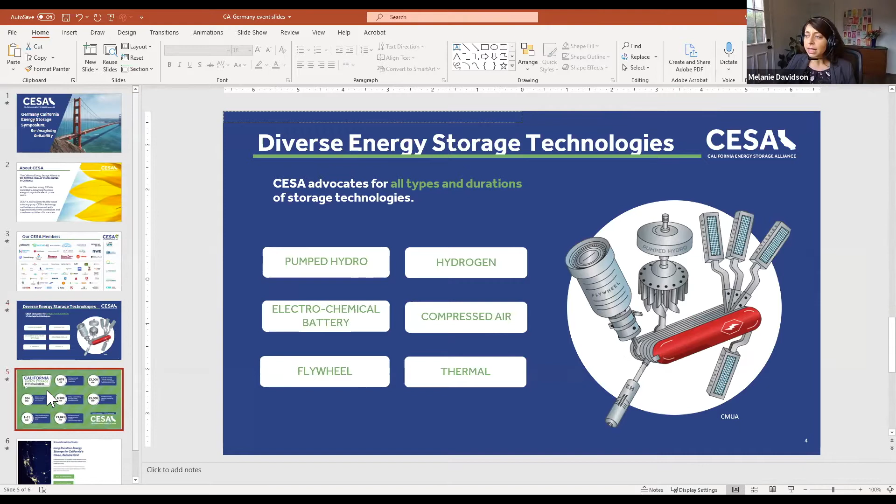California is a really remarkable place for energy storage. We're the largest energy storage market in North America. In terms of behind-the-meter energy storage, we've had over 300 megawatts procured, largely due to our Self-Generation Incentive Program. We've had over 5.6 gigawatts of energy storage procured in California. And we know that by 2030, between our own numbers and the CPUC's numbers, we're going to need between 8.9 gigawatts to 11 gigawatts of energy storage deployed in the next 10 years.

So the challenge is great. We have so many wonderful member companies that I know we're going to be able to achieve it.

And we do have some policy recommendations that we would like to see coming up over the years to allow us to support the grid and bring this energy storage online. That can include faster rollout, more support from the broader industries to help our members, educating authorities having jurisdiction and fire safety officials and permitting officials to get these systems online faster, as well as having the CPUC support us in getting longer duration energy storage systems online.

We know that as we go ahead, we're going to need more than 4 hours of duration on the grid to support reliability. So we're excited to be supporting long duration energy storage members. We recently published a study showing we're going to need a whopping 45 to 55 gigawatts of long duration energy storage by 2045 to support our clean energy grid. That can be anything from flow batteries offering 8 hours to green hydrogen offering seasonal energy storage. We're just excited about all the different ways that storage is going to come and support our clean grid.

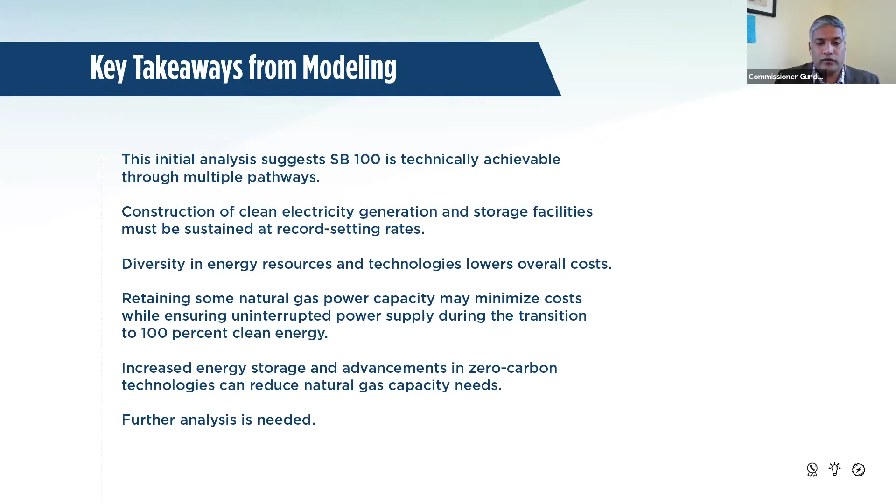Finally, further analysis is needed, as this is just the initial assessment of the SB 100 policy, and we will be doing a new report every 4 years. But in the intervening years, we'll be doing a variety of assessments to look at how you take the SB 100 goals and implement them, like land use concerns, how do you think about transmission planning, interconnection issues, as well as overarching equity issues that I mentioned earlier.

So just looking at the scale of overall build, it is daunting. In order to achieve SB 100 while electrifying large portions of the rest of the economy at the same time to meet our climate goals, we need record-setting build rates of solar, wind, and storage. To put this in context, the 3x number is basically looking at the last 10 years of the average build of solar and wind, and we need to triple that and hold it on a sustained effort for the next 25 years.

Similarly for storage, we're looking at an 8x increase. For context, last year we had about 500 megawatts of storage installed in California, and you're looking at practically an 8x value of that on a consistent basis. So the reason I laid this out is to show the importance of storage as we move forward.

The next slide, just looking at this visually, shows from 2027 to 2045 the resource build required to meet the SB 100 goals, which is compounded by the fact that we are going to electrify transportation and buildings as we go. Melanie alluded to some numbers, but as you see here, there is a need for a large amount, about 60 gigawatts of storage, the short-term or short duration storage, and you're also looking at pumped hydro or large-scale storage and flow batteries that Melanie alluded to at the top in the light purple.

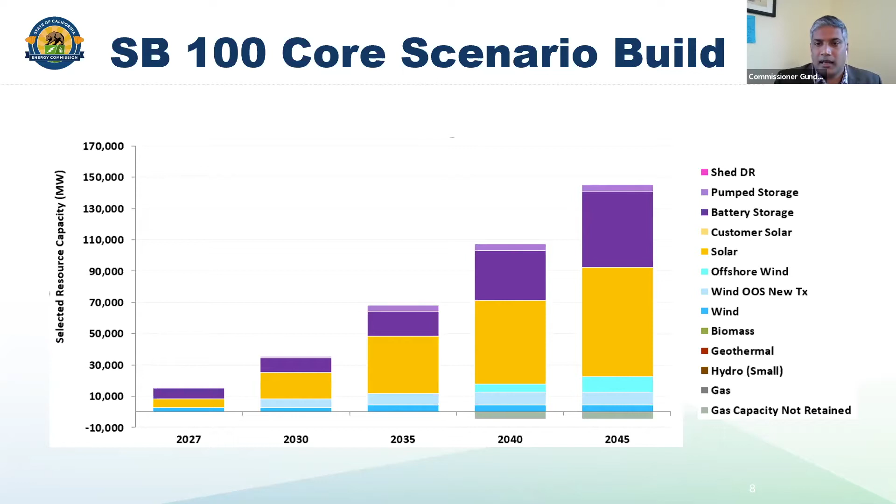I want to transition here quickly to the root cause analysis of what happened last year. This is important because as we think through clean, Governor Newsom always talks about clean, affordable, and reliable as the three-pronged approach we need to take as a state. What happened last year really cannot happen again.

The blackouts that happened last year in August send a signal that the clean energy transition is not reliable, or that we are not prepared for such high loads of electrification, or for the planning around the uncertainties of how solar and wind behave.

I wanted to set the context and make sure the record is good here, which is that CAISO, CPUC, and CEC, after the rolling blackouts, were asked by Governor Newsom to develop a root cause analysis report, and most of you have probably seen it already. There are three main issues that came out of it, and I want to set that up at the start.

The first is the climate change-induced extreme heat waves that happened across the Western United States. It's important to keep in mind the accelerated rate at which climate change is happening. The west-wide heat wave was so extreme that it was a 1 in 30 event in August and a 1 in 70 event in September — the 95th percentile and above heat that California and the overall West experienced.

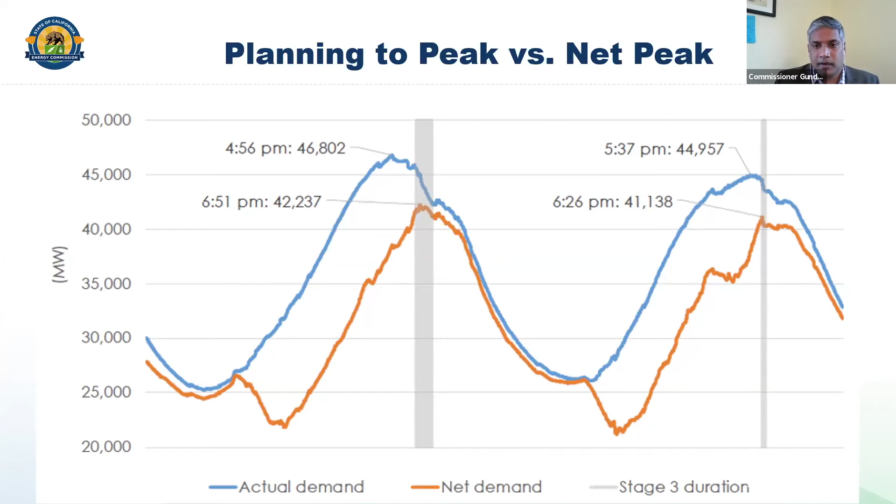As you see here, the rolling outages, grayed out in vertical lines, both happened in the net peak hours. So as we move forward, I believe storage has an important role, not just from a bulk grid demand perspective, but really from a reliability perspective in the net peak hours, where you're looking at rapid dispatch onto the system. So I will close with this slide.

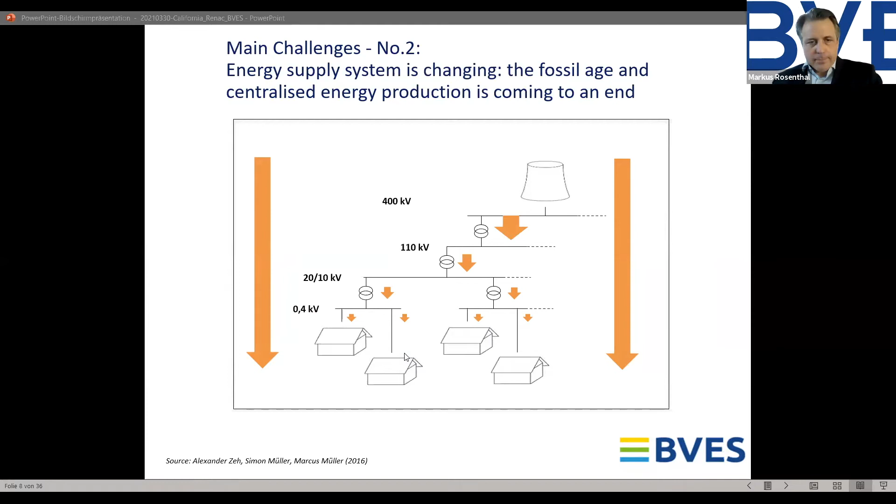So this is the old energy world, where energy was produced in a central way and used in a decentralized way. And this is the new world, where energy is generated in a more and more decentralized way, and of course used again in a decentralized way. But that is a new system, and that's the transformation — the big challenge of the transformation for regulators and for business to adjust to this new world.

Just one focus on Germany: we have lots of wind power in the north and lots of factories in the south. The only exception is Volkswagen — Volkswagen is in the north, but lots of other car manufacturers like Daimler, BMW, and lots of our factories are in the south. The big question is, in the centralized world, how do you bring the energy from north to south?

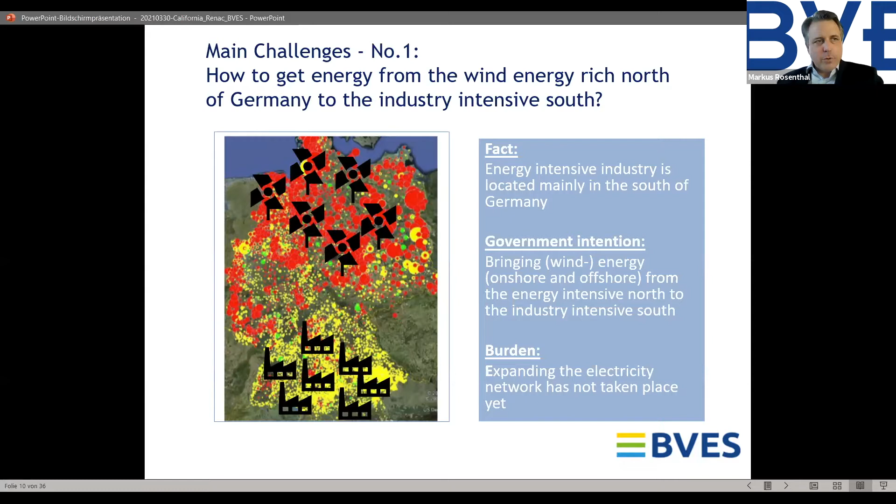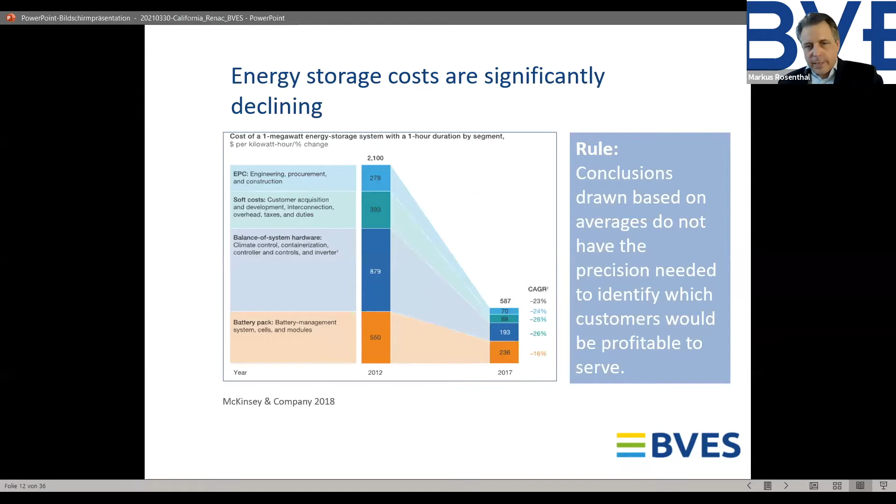As I already pointed out, energy storage costs are dropping. These are slightly older figures, but the trend is very clear. And as I pointed out, demand is increasing within the EU and on a global scale.

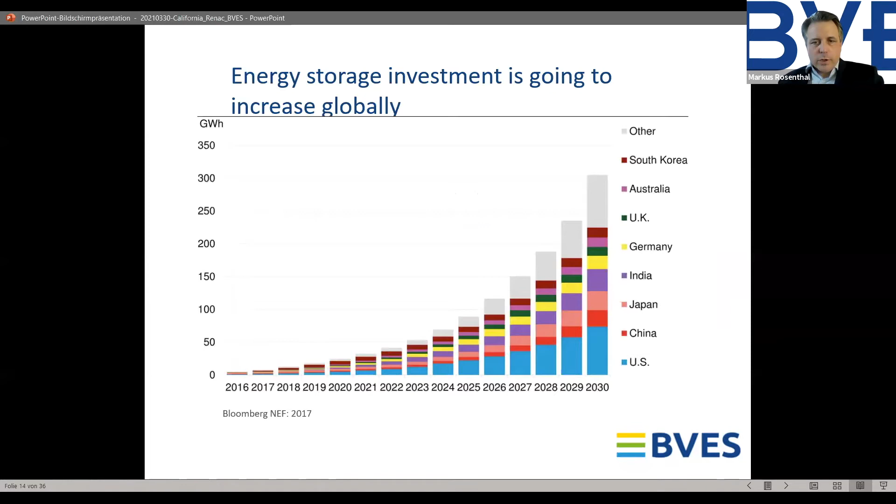Renewable energy in combination with energy storage serves as a solution because it decreases energy costs. It guarantees the availability of supply. Very important, it reduces carbon dioxide emissions because it's a much more efficient system than the old energy world. And that is very important in Germany. Coal is about a third of our energy supply, and coal is still acting as a safety belt when there's no wind and no solar power.

But due to energy storage, we are slowly moving into a new direction. Just to give you one example, we have a very big coal company in the east of Germany, and they installed a very big, many megawatts big giga battery, because they realized it's better for them to use a battery than to burn coal. And that is also an indicator that things are moving on. Of course, this company has also, for two years, been moving into the direction of renewable energy. So there's a permanent change.

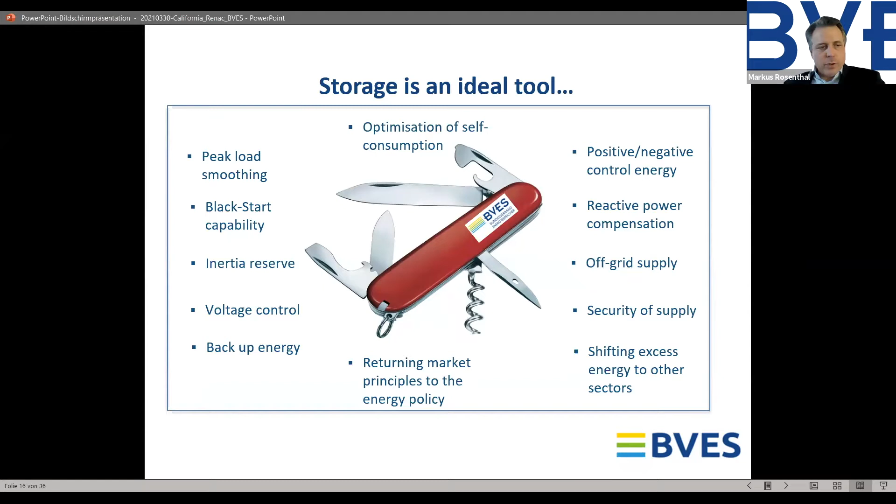We already have seen the Swiss knife in the first presentation. You will have seen this picture in one way or another, showing what energy storage can do, which services energy storage is offering.

Now I'm focusing on the regulatory and the political environment.

As I pointed out, McKinsey has come up with a very simple definition. And thank God the EU Commission and the national governments contributing to the EU decision-making process, including our Berlin government, said energy storage is a means in the electricity system deferring the final use of electricity to a moment later than it was generated. What you have here is a slightly more complicated phrasing: energy is generated and used at a later time. What's the role of energy storage?

What's the role of energy storage in the market? Within the EU, it is very clear that energy storage should be market-based, and it should play a competitive role in the market.

We do have a regulated market where the transmission system operators are active. They have a guaranteed income that is decided every five years on a regular basis by the regulator, determining how much income they have.

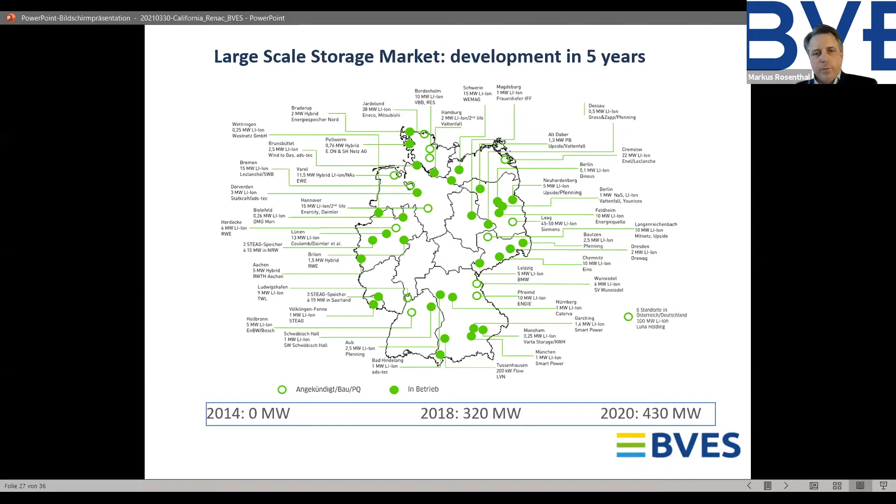What you can also see is just one picture in terms of batteries for bigger units in energy storage. In 2014, we couldn't have shown this picture. In 2020, that's already happening. And what you can see is market forces are fast, market forces are driving the business.

So I come to the conclusion: energy storage is a game changer for the regulation. Energy storage is many technologies - it's battery, thermal, hydrogen, and much, much more. And energy storage guarantees the quality and security of supply and the market integration of renewables.

We do have two English-speaking working groups at the BVES. One is the EU working group, focusing especially on EU lawmaking, and the other is the International Markets Working Group, where we also happily and consequently focus on the United States a lot, but also other countries. So thank you very much. I hope I kept my time, and any questions, please feel free to ask me.

Thank you so much, Markus, for sharing your insights. I found it very interesting, and I see that Melanie Davidson is still with us from CESA, and that both you and CESA use one of the same slides to describe energy storage.

Since we don't really have more time for questions, I'm just gonna ask you a question - you can just shake your head yes or no. Both the German Energy Storage Association and CESA are very involved with policy for the energy storage industry. Are you guys working together at all? Do you collaborate? I'm relatively new at our association, so this is my first contact with the United States, but I'm happy to share.

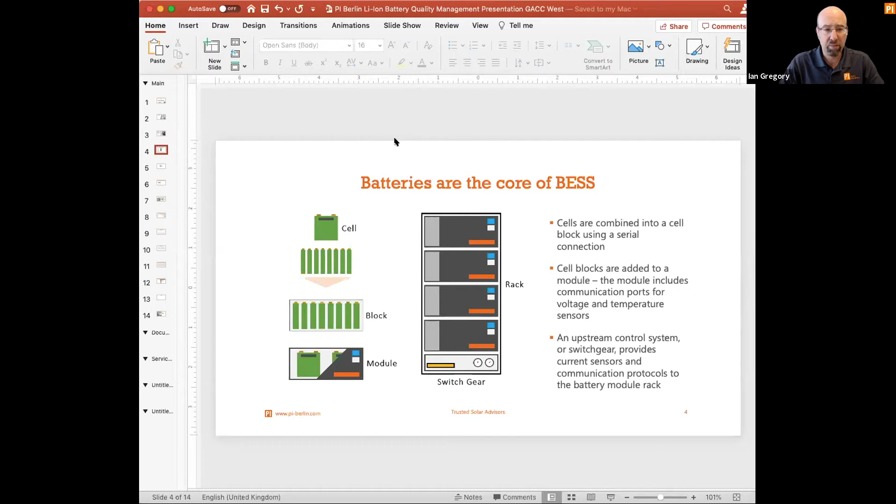Batteries, here's an image showing the breakdown of batteries within a storage system, made up of individual cells that are combined into blocks and then into racks. So that already indicates that managing quality in large scale storage systems requires management of quality everything from individual cells up to the combination of many hundreds of individual cells into the complete system. Lithium ion is still today the dominant battery technology, making up more than 98% of batteries deployed as part of large-scale storage systems in the US today.

So paying attention and focusing very much on lithium ion battery technology is important for us and important for the industry.

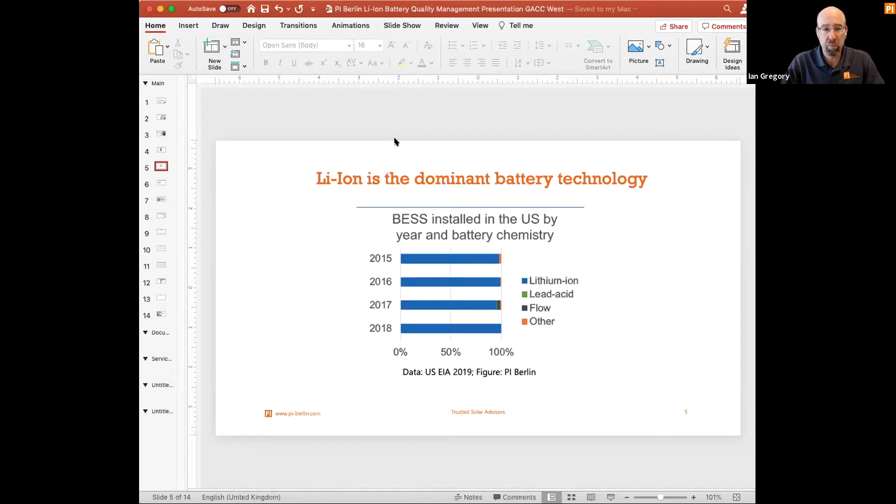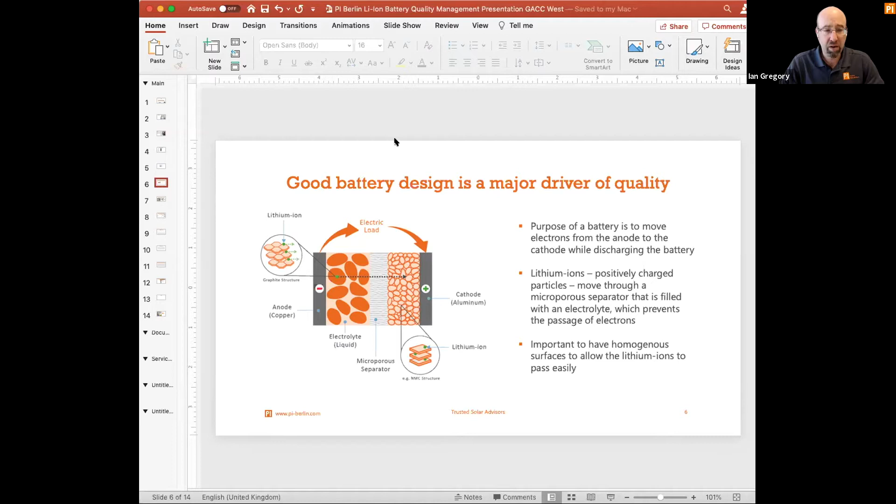Good battery design itself is a major driver of quality, no surprise. For example, it's very important that the surfaces within a battery design have very homogeneous surfaces, and that the various chemical processes that need to take place in a battery are allowed to take place with a high degree of both safety, reliability, and of course performance. But more than that, the manufacturing processes that go into manufacturing a battery are equally as important.

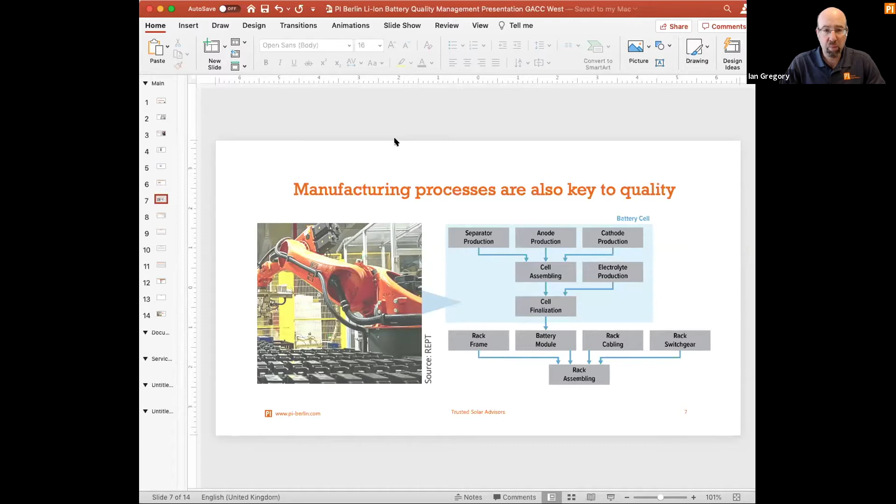If you take an overall view of quality, you need both a well-designed battery and a well-manufactured battery to produce one that's going to work as you expect. In fact, the processes of manufacturing batteries are very complex, involving over 170 individual steps, each of which has to work right in order for the finished battery to perform as expected.

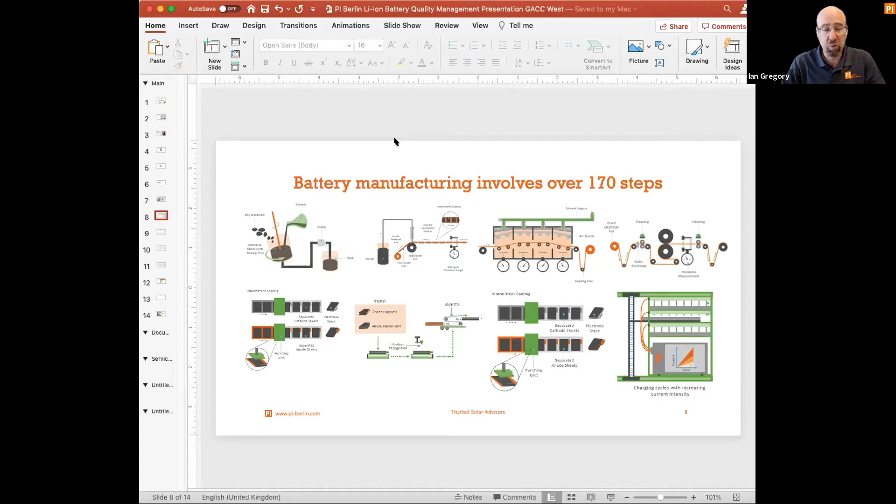There are a number of key risks to battery quality, and the focus on the battery within the broader storage system is extremely important, as the battery represents the greatest risk to safety in the system, as well as the fact that without a good battery, of course, the rest of the system won't perform the way you expect.

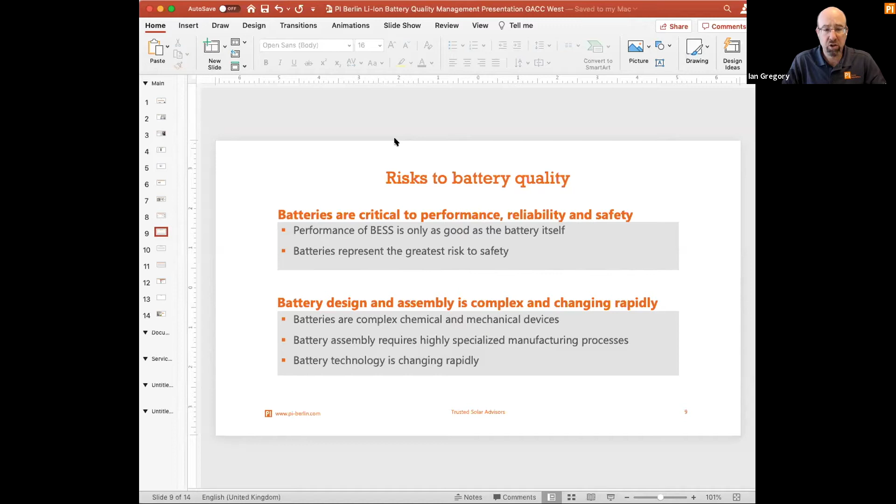We're also in a challenging environment where battery design and technology is changing rapidly, which is a good thing, but demands a lot of attention to quality to make sure that as rapid changes in technology take place, it's not impacting quality. We also see the same in manufacturing processes. In many facilities that manufacture batteries around the world, we see under one roof, often production lines that are very different from each other, producing the same battery, but with very different manufacturing technologies, each of which could have an impact on the quality of the finished product.

The number of battery manufacturers is also proliferating rapidly. Beyond the big players in the industry like Samsung and LG, a large number of new manufacturers are coming into the market from China, for example. And then questions certainly are raised, is that those batteries may be cheaper, but is the quality being impacted by the lower cost? So clearly we need solutions to be able to ensure that those batteries are of high quality.

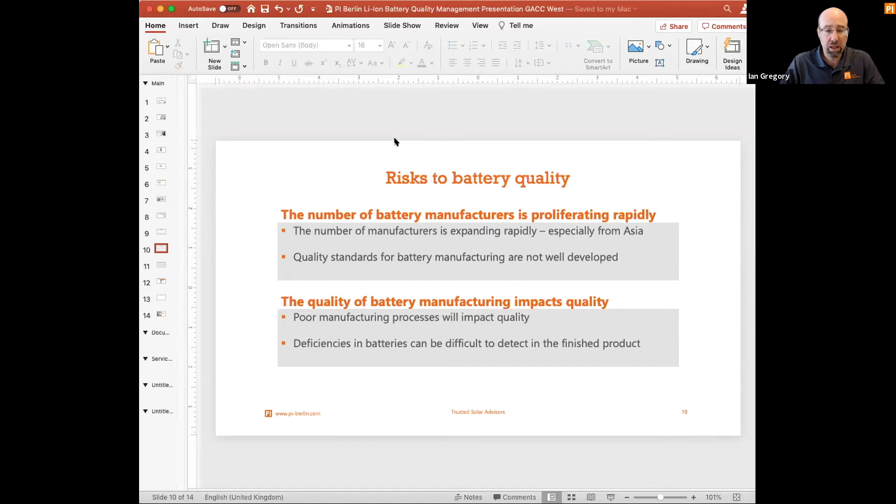The last point, risk, is clear within the manufacturing process itself, that any of the 170 steps which are not conducted correctly could impact the finished product. Having good insight into the actual manufacturing processes is really important, because many of the defects that may impact the safety or performance of a battery are very difficult to detect in the finished product. Only by really understanding the complete manufacturing process behind the battery can you really have a full picture of its quality.

To close, in terms of what PI Berlin does, we provide independent factory audits for major buyers and investors in the industry as a key way to manage the quality of the battery itself. We go behind the curtain, taking a detailed look at the complete manufacturing process, and report back to the buyer or investor with actionable findings, so those findings can be used to work with the manufacturer to drive improvements in quality before the batteries are produced for any specific project.

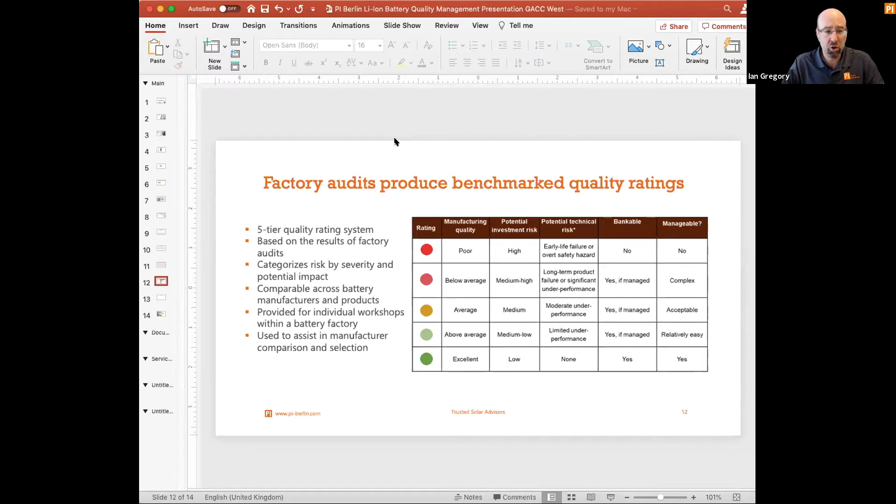PI Berlin has experience conducting more than 300 audits of different factories around the world, manufacturing PV modules, inverters, and batteries. Out of that, we produce quality ratings, benchmark quality ratings. As we operate to a common standard across all factories we assess, we're able to benchmark the quality of one battery versus another, which certainly assists any buyers or investors who are shortlisting potential suppliers.

In summary, we're well aware that the deployment of large-scale battery storage is growing fast, but batteries present a mix of risks that we must pay close attention to while their deployment grows rapidly, from technology changes to proliferation of manufacturers and the complexity of the manufacturing process. The good news, however, is that factory audits are an effective tool to identify where risk is and mitigate it before production for any particular project.

Thank you, Angelica. Back to you.

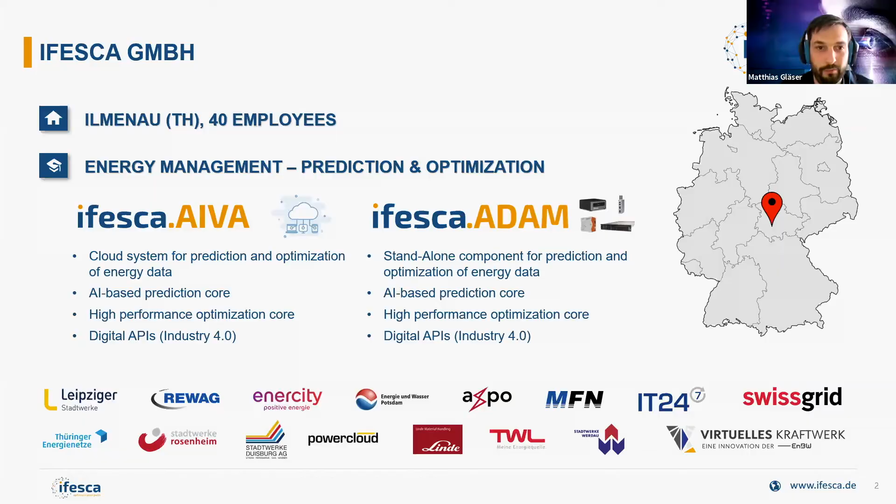So now I hope it works. Beautiful, thank you. So as I mentioned before, we have these two products, and what we are looking for in the US are partners and customers, of course. We are looking for energy sales, power generation, all these beautiful people who can get us information about the US market, and we can share our information in forecasting and optimization.

So what's our forecasting platform? We have our cloud product, called IFESCA AIVA, and this is a fully automated analysis and forecast platform. So you have a short look about how it works. We have many data from wind, from solar, from heating points, from electric cars, and so on, that we are collecting in our database to get a forecast and an optimization for this.

And what we also use are influencing factors to get the best forecast you can get on the market, so you can get a very high benefit.

So how does it work? On one side, you have a descending system in your company; these are the input data. We need about 3 months to 1 year of data from behind, to learn from this data in our AIVA hive and get a good forecast. Our knowledge base benchmarks this with other historical data and uses its cognitive core to get the best methods and analytics systems to get it fully automatically for the benefit of the forecast.

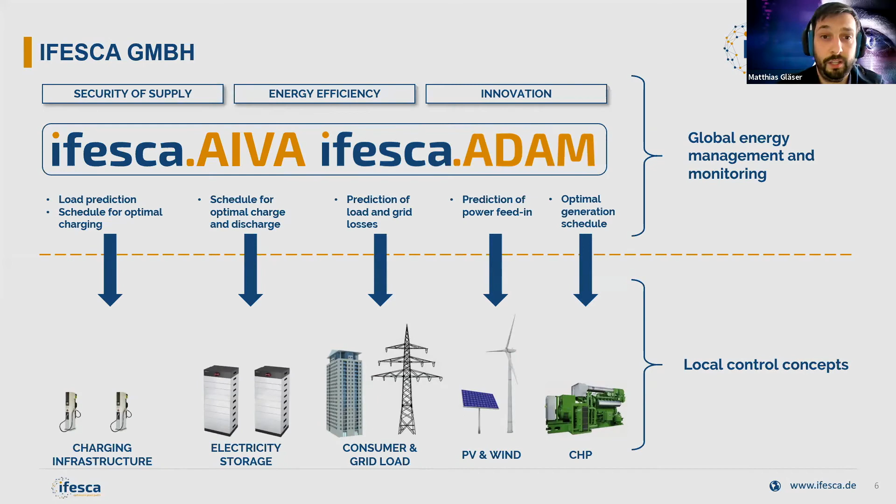So to summarize, we can guarantee optimal power plant usage, calculations and mass data processing. You can use our virtual power plant optimization and a lot of other benefits from our system, for example energy data forecasts in real time. You only need 5 to 10 seconds to get a good forecast in any time series you want.

For example, you can forecast in the intraday market - you only need a forecast for 15 minutes and so on. In about 5 seconds you can get around 10,000 forecasts if needed from our cloud system, with a very high level of quality.

We also have self-learning forecast methods. That means we look into historical data from your company and check the quality of the forecast in the background, rolling forward into the future. So we can compare both sets of data and get the best benefit from it.

And of course we have a high-end forecast algorithm - I won't go into it in depth now - and an innovative system architecture.

That means we can connect to any new energy data system or energy management system via the REST API. But we can also connect with old systems or an SFTP server with an optimization to get the data, calculate the forecast, and get it back via email, SFTP, or something else. As you can see, we are very flexible on that side.

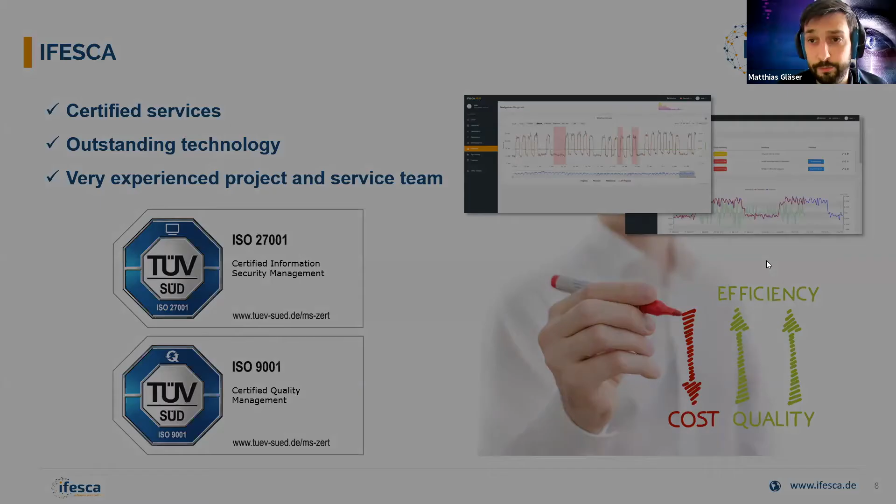And so I'm done with my presentation, Angelica. Maybe there are some questions we can answer.

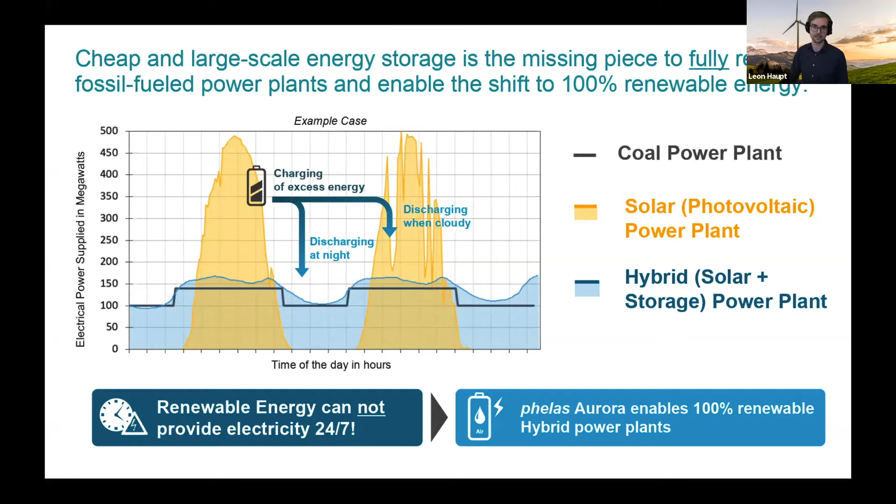We are addressing a certain gap. We see a technology gap - lithium ion and other technologies are really important, but we want to address this particular gap of large energy-centric applications which will come up in future. We also want to do that in a modular way, so you're not reliant on pumped hydro or compressed air, which need certain geographic constellations. We want a greenfield approach with a modular liquid air energy storage system. Our gap is from 1 megawatt hour up to 1 gigawatt hour, and we want to provide energy up to 1 week because we think that's an important sweet spot.

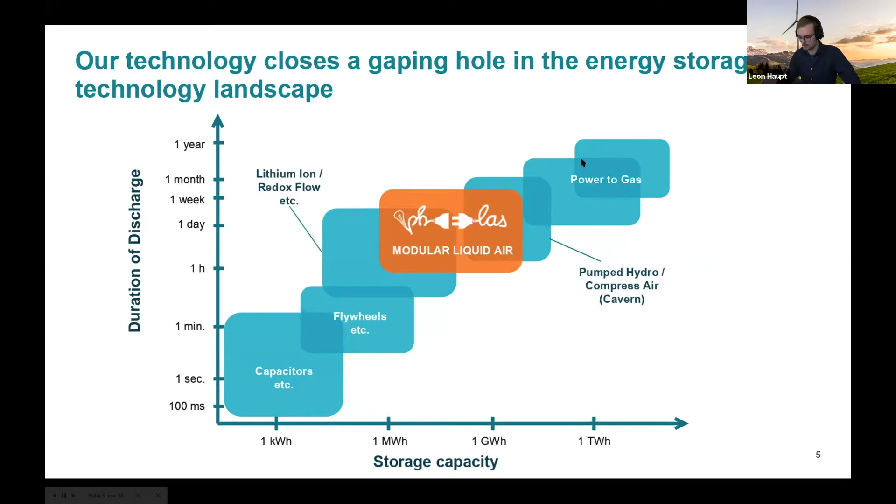How are we going to do that? We use a well-known technology - the liquid air energy storage approach, but redeveloped in our own way to make it accessible and suit it in a container. We want to modularize it in a shipping container. Our goal is to use a 40 feet high cube shipping container and separate the energy storage from the power storage. One power unit will be roughly 1.5 megawatt electric, and the energy storage unit will be up to 2 megawatt hour electric.

You can actually size them individually, so you can easily add another energy storage unit and increase the plant's storage duration. The technology itself, because it's a well-known thermodynamic process, doesn't have ongoing capacity degradation. There is degradation, but it's a well-known component, so we can use predictive maintenance to address that early on. We use standardized components - we don't want to redevelop certain things, but use known components from chemical engineering, which gives us high reliability and a high TRL of the whole system early on.

The round-trip efficiency is one of the biggest and first questions, especially in Germany, where we're all really efficiency driven - it's always, oh that's nice, but how efficient is it? And I always say, well, it's not about how efficient, it's about how much does it cost. The goal of our system is to drastically reduce the capital expenditures, at the expense of efficiency too. We have a specific approach to our cost engineering, and we say that around 50 to 60% efficiency is still enough to address a lot of really interesting use cases in the energy market of the future. But the more important part is to be really, really cheap on the CapEx side.

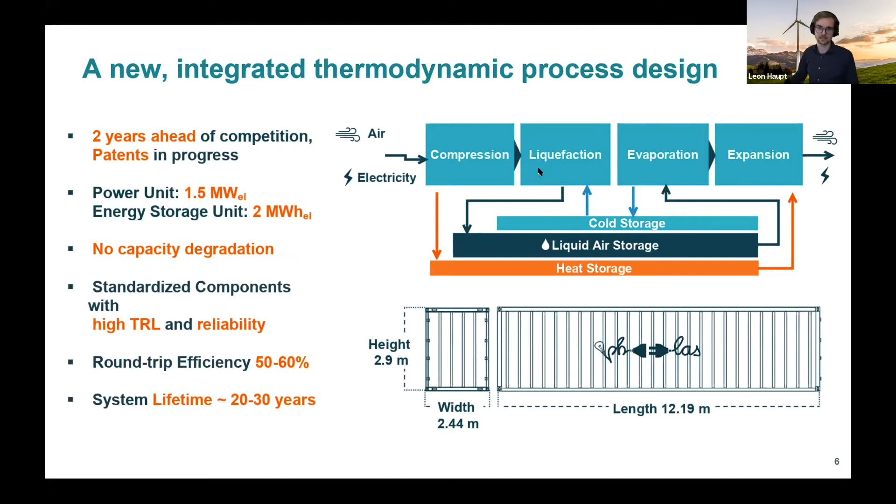Summing up, the main takeaways from our technology: we are flexible in sizing and transport, also addressing different use case needs. We have a really low cost energy storage module, which enables really, really cheap long duration systems. We use air as a storage medium, so it's not toxic and doesn't have any flammability problems. We use proven and reliable technology, which also gives us the possibility to give a warranty for our system.

Because of all the characteristics of the technology, it's quite ESG criteria proof. All the materials and supply chains we use can be sourced with a domestic supply chain. We're not reliant on any rare metals from overseas or other countries. So we get a really good ESG rating, which is also future-proof in our opinion.

Last but not least, we believe that a really large-scale energy storage system, and the energy sector of the future, should be supplied with technology that can be produced locally. So we push a domestic supply chain, not only in Europe, but wherever chemical engineering or air liquefaction is produced, this storage can actually be manufactured.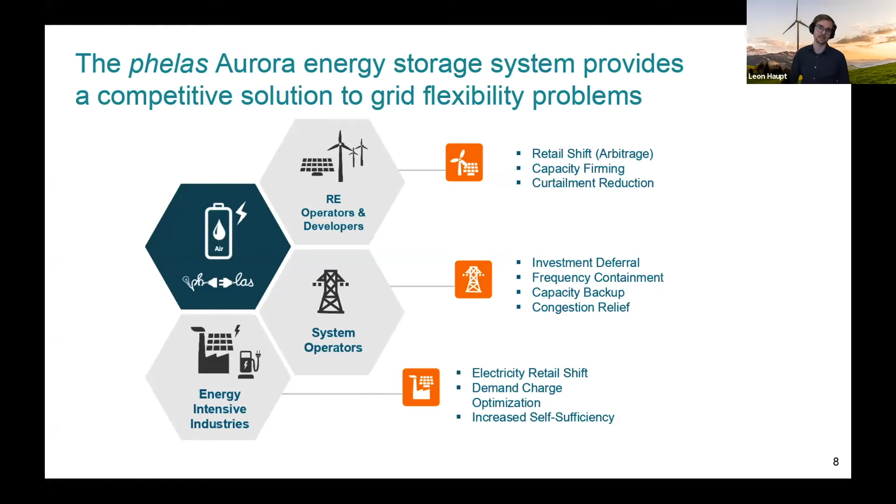Quickly about us: we're quite young. We started development in 2018 and tested first hardware in the lab. We're currently fundraising in our pre-seed round, finishing our proof of concept at lab scale, but in parallel already working with early adopters on a full-size pilot. We plan on releasing our first commercial system by 2023.

What we're looking for, especially in this context, is interesting partners who can give us market insights and future storage requirements, since we're still in development. We can develop the storage to your market needs and storage needs. We're looking for early adopters, pilot projects, and of course investors.

Why are we doing that? We want to build the cheapest energy storage combined with the cheapest energy production, and thus make 100% renewable energy globally a no-brainer. This is our vision, and I'm happy to answer your questions.

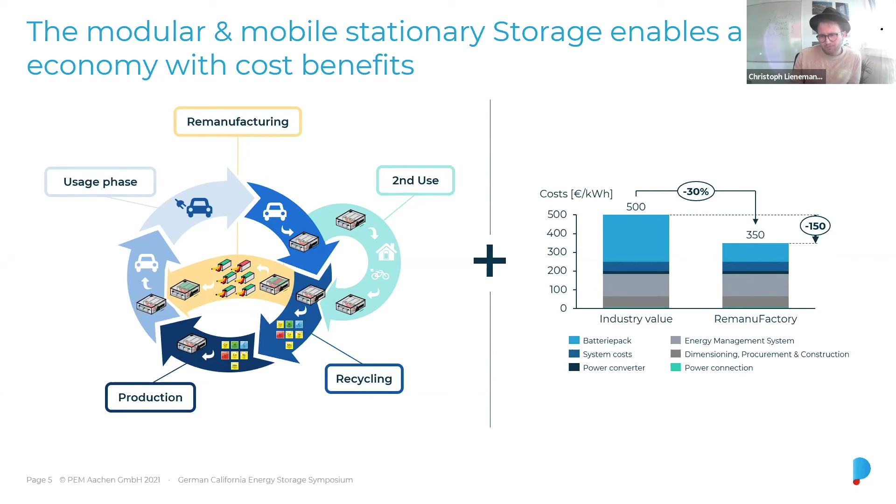What we think is important now is to build a circular economy for batteries, especially for vehicle batteries, offering a second life, but also remanufacturing options for single components of the batteries, thus drastically reducing the cost of batteries for energy storage and other applications by giving them a second life or a remanufacturing route in the circle. That's one project we are working on at PemMotion, and for us it's a really interesting project.

As we see, there's a lot of batteries going into first life now, but at some point they will come back out of this first life. And the question is what to do with all these big piles of batteries, which are first very expensive, but also have a lot of very precious material inside. So we don't want to waste this opportunity and tap into the potential we see here.

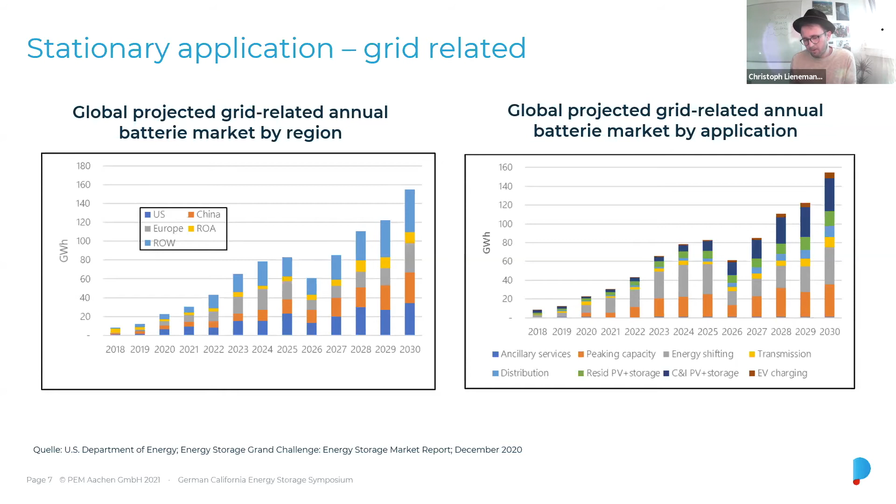So who is PemMotion? PemMotion is an engineering consultant company. We support our partners in their industrialization. So from the very first scratch up to serious production, we can go with you the full journey.

We have done it ourselves several times, with the example I showed at the beginning with Street Scooter, but we also accompanied a lot of other startups, both here in Germany and also in the US. So we can help you on one hand with consulting and business services, but also really doing the engineering, the industrialization, the homologation for your products.

Also, we have our own spin-offs, our own companies we start, and want to bring these companies at some point also to the US and search there for investors. One example I just showed was the Street Scooter company, which was sold already to DHL, or e.GO Mobile. There are currently, I think, very interesting opportunities for digital marketing on electric vehicles, but also on hydrogen and battery production and battery testing.

As I said, it all started with Street Scooter, and it finally led to PEM. PEM was founded in 2014 as a spin-out of the RWTH Aachen University here, and we do a lot of things on the industrialization roadmap for your products. So we can do the engineering, the product validation, the manufacturing planning, and also the testing, homologation, and classical business development.

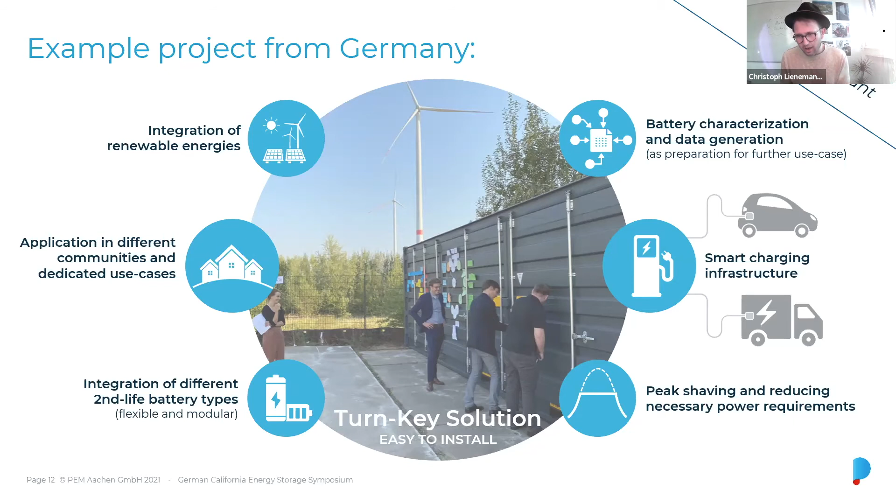So we want to be very local in the community, combining renewables with the needs of your community. This is a project where we just have the first storage standing here in front of our building. We just received a quite major grant here in Germany for scaling this up, for industrializing it, for putting it into different communities. And this would be a great project for us to bring also to the US.

And how we want to do this together with the California Mobility Center. I think the CMC is a very unique opportunity for companies in their industrialization, going from the idea to the production. So the CMC offers manufacturing, testing, and commercialization for their partners and members. It's a combination of universities in Sacramento, companies, and also institutions as partners. Sacramento is the capital of California, and also, of course, driving future legislation for electric vehicles and green technology.

We just recently opened, I think 3 weeks ago, the first factory where we want to offer this kind of service, or we are already offering this kind of service to the clients. And yeah, that's what Angelica meant.

Yeah, I'm really looking forward to move to Sacramento and be there in person. Unfortunately, we still have a pandemic situation, and I'm not able to travel at the moment. Nevertheless, we are operative. We have people on the ground locally working for PEM. So I'm very much looking forward to discuss in detail how we all could collaborate together. So shoot me a mail. And thank you very much for joining us today.